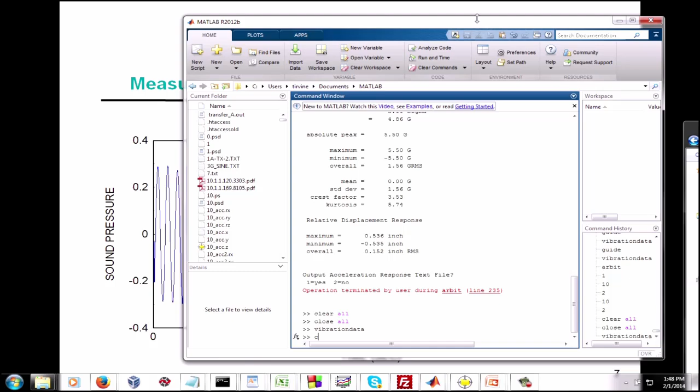So what else can we do with this tuning fork data here? Well, I've got a program I'll show you. It's kind of a fun little program to run. And I'm going to open up my MATLAB here. Now, I've got a program here, and what we're going to do actually is we're going to take a textbook sine function, and we're going to do a numerical curve fit to this data. And the way this will work is the textbook sine function is going to have amplitude, it's going to have phase, and it's going to have frequency.

And we're going to take those three parameters, and we are going to vary those three parameters randomly. And we're going to come up with maybe several thousand trial sine functions, and we're going to compare each trial function to the raw data. And the way we do that is we're going to take the trial function and subtract it from the raw data, and the idea is to minimize the residual error. So we want to come up with the best curve fit through mostly brute force random number generation, but then I also do have some convergence routines built in.

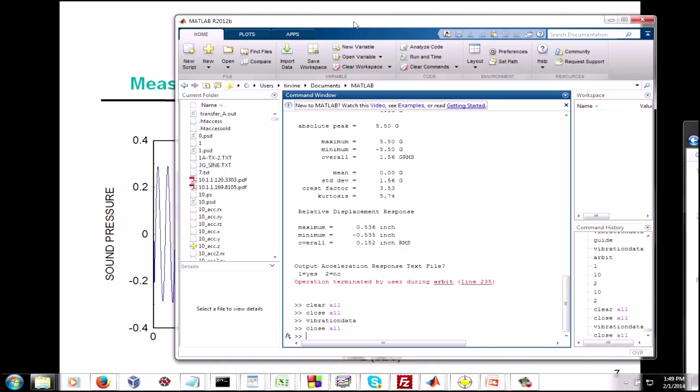So if we go to our MATLAB workspace here, or command window I should say, I have a program, and this is available on my blog, and it is called SineFind. SineFind. It's available on my blog. You can freely download it. So I'm going to say enter, and I'm going to say, well, what does this script do? This program performs a sine curve fit for an input file. The time history must be in a two-column matrix format, time in seconds and amplitude. So I'm going to do choice number 1, which is an external ASCII file.

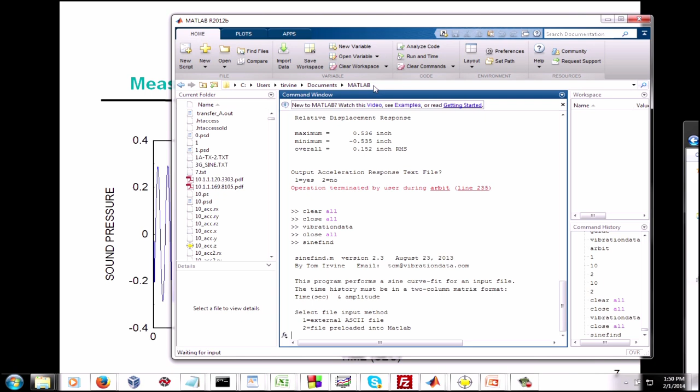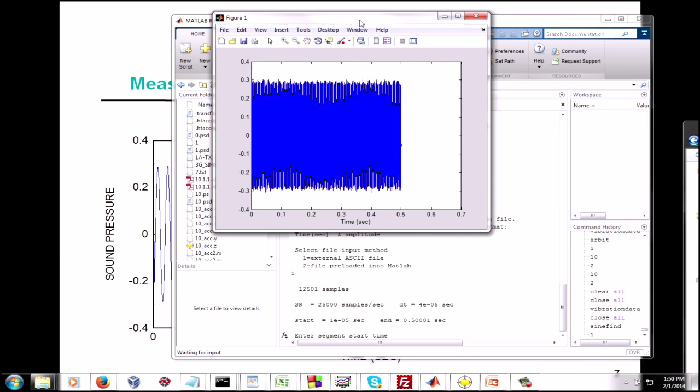So I'm going to call up a file, and it's called tuning_fork.txt. This is some measured acoustic data, sound pressure data. It's uncalibrated, so we don't know how many psi or decibels it is, but that's okay for what we're doing here. And actually, the typical way to excite a tuning fork is to,

well, if you had it in your right hand, you could just rap it against the hard part of your left palm, for example. And that's something that, say, a doctor would do if you were trying to check your hearing or your nerve conduction. Sometimes these tuning forks are also mounted in wooden boxes, and there'll be a little wooden mallet with a rubber tip that you can tap against the sides of the fork.

Some people might think, well, it's a steel tuning fork, why don't you just take it in your hand and strike it against some hard surface? And yes, you can do that, but you might damage or cause some cracks or nicks in your tuning fork, so that's not recommended. But any of those ways that I mentioned will excite the tuning fork into a transient response, and the damping or decay will be very slight, but in this case we're just looking at a half-second worth of time, and there is no decay going on.

Well, the tuning fork still has damping, but I'm actually exciting it into a steady state vibration. And how am I doing that? Well, I'm using a technique called magnetostriction, and we'll talk about magnetostriction in an upcoming unit. But let's go back to our SineFind program, and we're not going to try and curve fit the whole half second. Maybe we'll just take 1/10 of a second or so, or maybe 2/10 of a second.

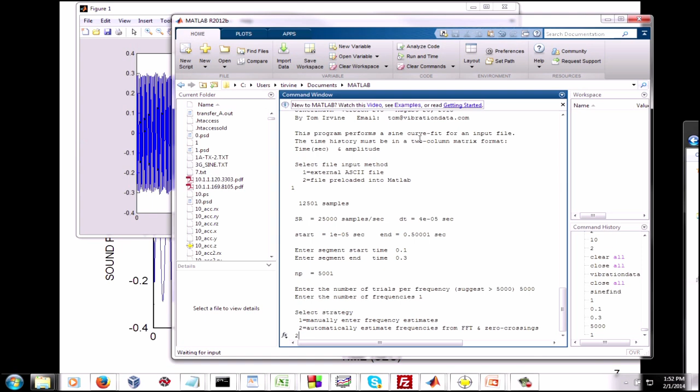There's two strategies we can use. We can manually enter a frequency, which is the estimated frequency, or we can let the program automatically figure out what the frequency should be. So let's do choice number 2. This will be an automatic. Now you can see real time what's going on with the curve fit in our progress, and there's some numbers scrolling by, and this 442.7, that's an estimate of what the natural frequency is.

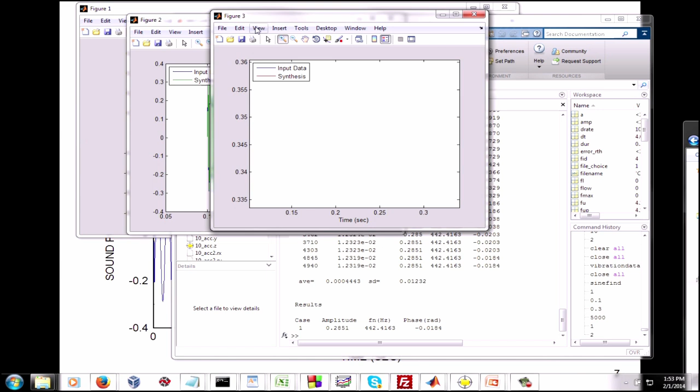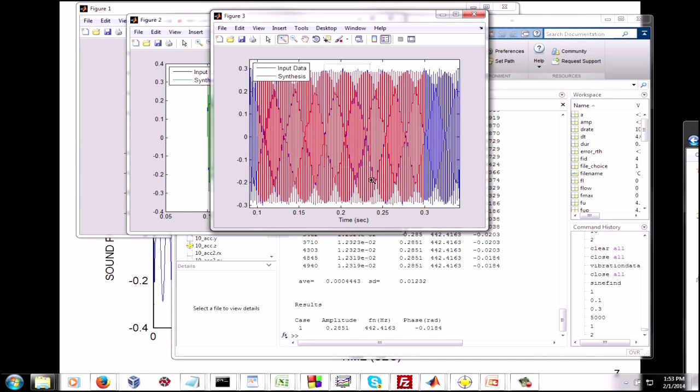Okay, so 442.4 hertz, and phase angle is not important for this case. So it looks like we got a pretty good curve fit here. Let's zoom in a bit, if I can figure out how to work the zoom. Nope. So then what I need to do is go to reset view. Let me try and zoom in again. Well, you get the idea. We did a really good curve fit.

So this gives us confidence that 442.4 hertz is the natural frequency of the tuning fork. And we already did the count the peak method, and we estimated 440 hertz. So this maybe gives us a finer, more precise, or more accurate estimate of what that frequency is. Now I've got 2 or 3 other things I want to show you about this tuning fork.

And one is if we go to Vibrationdata blog, and we type in piano in the search box, we can go to some music acoustics here. So I'm going to click on that, and I've got a diagram here, and this shows the piano keys. And if we download this as a PDF instead of opening it up in the web browser, you'd see this is a little more neat and tidy in terms of the way the keys are presented. In fact, let me just go ahead and do a save link as, and go to that file here, if you'll bear with me.

Oops. Try this one more time. Excuse me, so if we're going to go to C, MATLAB. Okay, that's where I put it. Okay, I've got a few too many directories and things going on my desktop, so you'll just have to be patient with me. Okay, this is a better look of what you'll actually see.

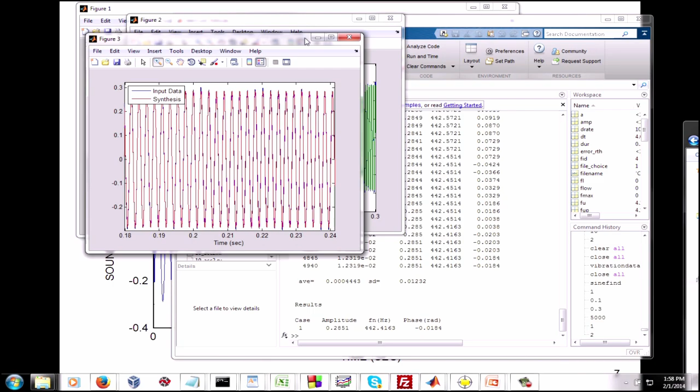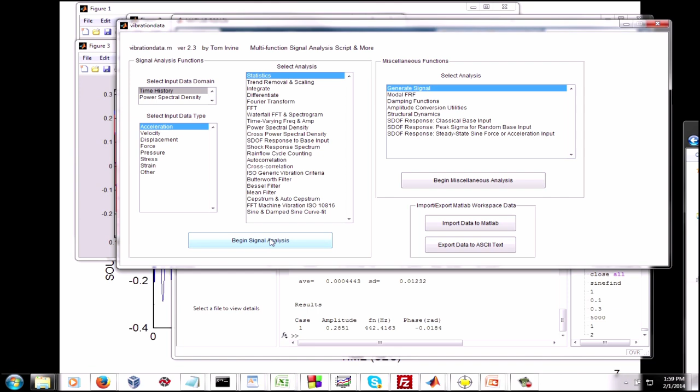So remember I told you about the vibration data script, vibrationdata.m, and you can download this from the blog. So this has all sorts of functions, and throughout the course we'll be going through some of these functions. So the first one I want to take a look at is a time history and its statistics. So I'm going to begin the signal analysis, and this will be an external ASCII text file, and it's tuning_fork.txt. The y-axis, I'm just going to say unscaled sound pressure.

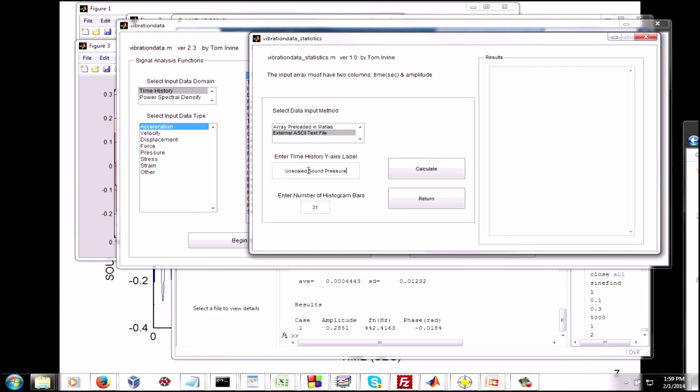We'll also be taking a look at the histogram, more about that later. So then I just enter in the file name. We've already selected the file via the pop-up window, y-axis, click on calculate, and the histograms, we'll cover those in a minute or two. There's our basic time history again. You've seen that before. It's from the tuning fork. But let's go over to this box here. So the result box here has some information.

It has some information on the time step delta t, and sometimes we'll get data that has a variable time step. So this will also show the minimum time step dt min and the maximum time step dt max. We also have the sample rates. The sample rate is the inverse of the time step, and then SR minimum, the minimum sample rate, is the inverse of the maximum delta t, and the maximum sample rate is the inverse of the minimum delta t. So this just gives us an idea of whether or not the delta t time step is constant.

We have some statistics here. We have the mean value. For our purposes, the mean value is essentially 0. Then we have our standard deviation, our RMS. Well, what's the difference between a standard deviation and an RMS? Well, we tend to use those terms kind of interchangeably in vibration analysis. But I want to show you an important formula here. So if we have a signal, maybe I'll put this at a bolder font or larger font.

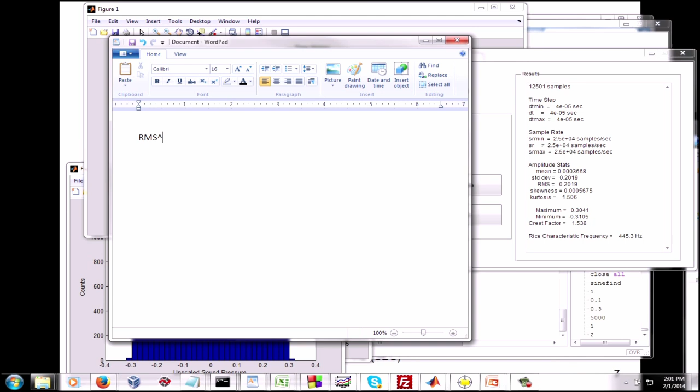RMS squared equals the standard deviation squared plus the mean squared. So the RMS value is always greater than or equal to the standard deviation. And RMS, as most of you would know, is root mean squared. So it's always greater than or equal to the standard deviation. And sometimes we'll represent a standard deviation by the Greek letter sigma, or we might say 1 sigma for one standard deviation. And then we have the mean.

Well, in many cases, not all, but in many cases with measured dynamic data, either through AC coupling or high-pass filtering or just the nature of what we're measuring itself, mean will be 0. Not always, but in most cases probably mean will be 0. Well, if mean is 0, RMS and standard deviation are the same numerical value. That's pretty much what happens here to 4 decimal places for our tuning fork data.

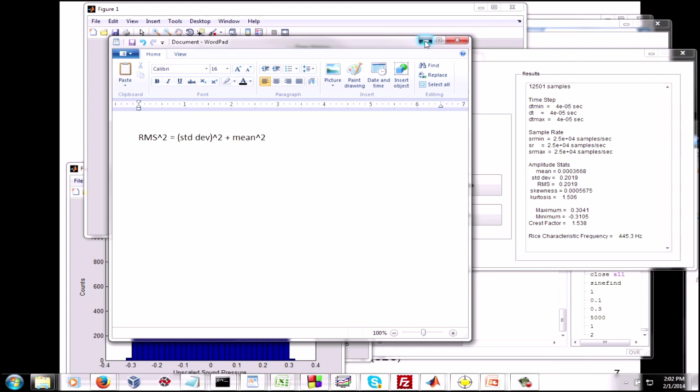So we get a little lazy, a little sloppy, I guess, and we kind of use standard deviation and RMS interchangeably. But please know that they are actually different quantities. Okay, enough about that. Kurtosis, we'll be covering that later on, but for a pure sine function, kurtosis is 1.5. When we get to broadband random vibration, then we're going to find that if that vibration has a normal distribution, then the kurtosis will be 3.0.

Then we see the maximum and minimum. Now crest factor, that's sometimes an important parameter. That is going to be a ratio of the peak absolute value divided by the standard deviation. So this just gives us an idea of what is the scale factor to go from the standard deviation to the highest absolute peak.

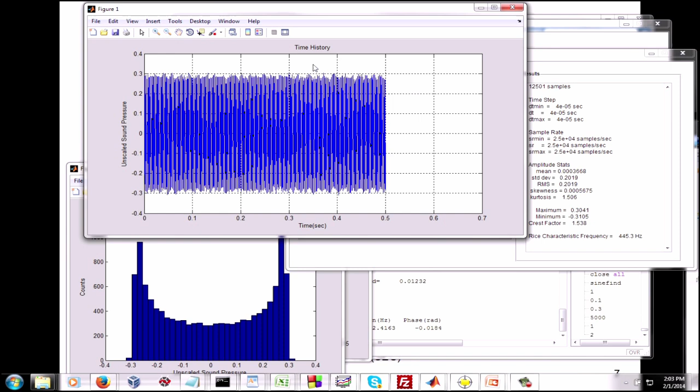And then I was talking a few minutes ago about the Rice characteristic frequency. In this case it is 445.3 hertz. So that's just another way of estimating the natural frequency. But of the three methods we've looked at so far, the most accurate in this case in terms of getting fine accuracy, I would say was the sine curve fit. Okay, so that's pretty, oh, one other thing too.

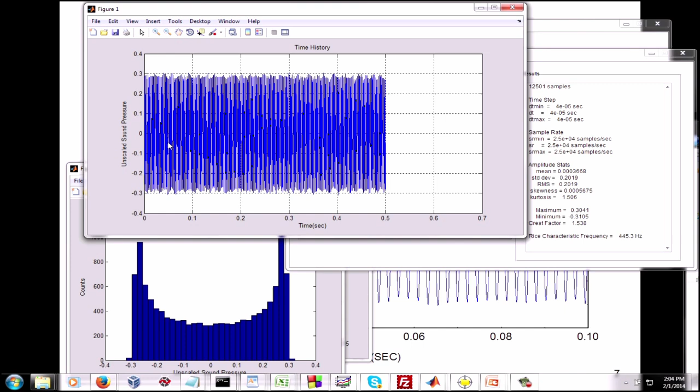A lot of times when we have signals, we like to take a look at the histogram. Well, how do you calculate a histogram? Well, we're going to take the amplitudes and divide them into bins. Typically these would be evenly spaced bins. Now this is digital data, so what are we going to do? We're going to count the points of the instantaneous values that fall within each amplitude bin. And we're going to plot that up, and it's going to be a histogram.

So here's the histogram of the tuning fork data. The y-axis is counts, that's the number of instantaneous data points within each bin. Then the x-axis here is unscaled sound pressure. Now our tuning fork isn't quite a pure sine function, although it's somewhat close. A pure sine function has a histogram that's called by the nickname bathtub curve.

And the explanation for this bathtub curve is that the sine function likes to dwell at its peak negative level or its peak positive level, with a somewhat rapid transition in between. So that's the nature of a pure sine vibration.

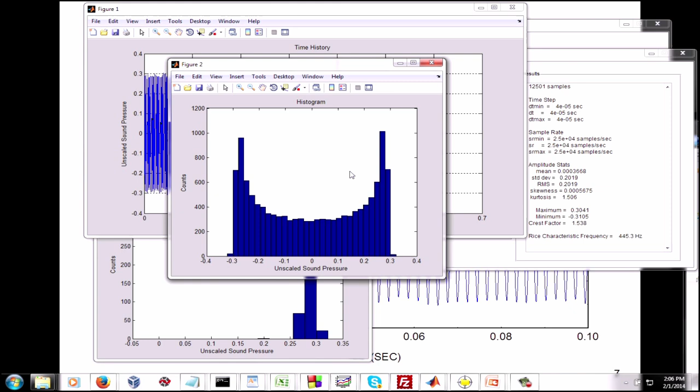Now, later on we're going to be talking about white noise and broadband random vibration. A random vibration would typically have a bell curve histogram, or you might say a normal distribution, or a Gaussian distribution. So Gaussian distribution, normal distribution, bell curve distribution, we kind of use those terms to describe the same thing. And we'll be talking more about random vibration in an upcoming unit. There's also one called the absolute peak value distribution, and we'll be talking about that later, so I'm not going to cover that now.

So anyways, it's very typical when we get vibration data that we have a task of trying to figure out what the parameters are, do some signal identification. If we have a sine function that's present in our data, we have to think, is that an excitation function? Is it a natural frequency? Is it a natural frequency being excited into resonance, or what is it?

What's going on? So part of what we need to do is to develop some critical thinking skills. That's one of the themes in this course. I want the students to be able to develop some critical thinking skills. Well, let's move on to some other slides here.

So we're talking about natural frequencies, and there's different ways to demonstrate this, and we'll show one in a minute. But a natural frequency is the frequency at which a mass will vibrate if it is given an initial displacement and then released so that it may vibrate freely. And free vibration is also called simple harmonic motion.

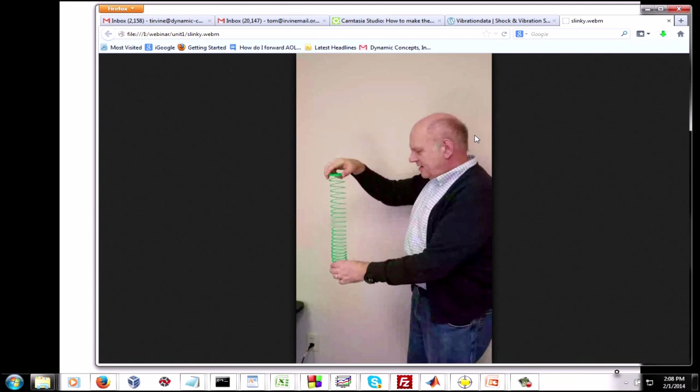And this is a slinky, and I'm holding it upside down. And I'm going to give the slinky an initial displacement. Now, after I release it, the stiffness property from Hooke's law will try and pull the slinky back to its equilibrium or rest position. But the slinky is going to overshoot the rest position mark due to its mass or inertia. So what I'm explaining in this video is that we're going to give the slinky an initial displacement there, and then we're going to watch it in its free vibration. And that's going to occur at the natural frequency of the slinky.

So here I am, I'm releasing the slinky, and it's going through a couple of cycles of oscillation, each time overshooting the rest position. Now eventually it does return to the rest position after a number of cycles oscillating at its natural frequency. There is a property called damping going on, and damping is an energy dissipation mechanism, and that occurs because there's frictional effects in the coil. There may be some air resistance, for example, and some boundary damping. But anyways, what I've done there is to sort of demonstrate natural frequency with the slinky.

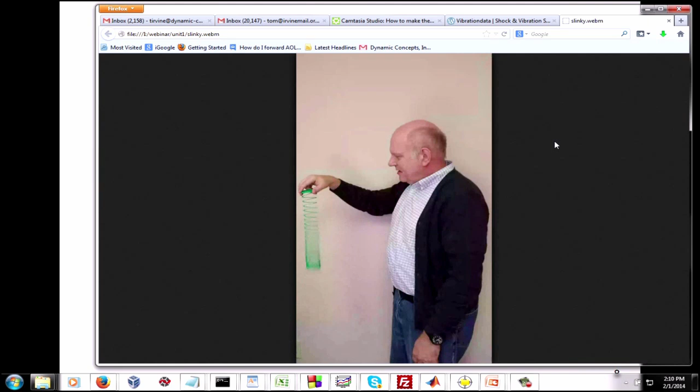So let's see what we can do with the slinky. Let me give it an initial displacement again. So now I'm giving it an initial displacement, and I'm going to do a little trick here. And if you watch the top of my hand, the top of my hand is actually vibrating at the natural frequency of the slinky. I'm exciting this to its natural frequency, which is called resonance. So this is a resonant effect. Motion going on with my hand, and there's dynamic amplification effect. Just barely see. And I would call this a base excitation effect, even though my hand's at the top of the slinky. Or you might call it a seismic excitation or support motion.

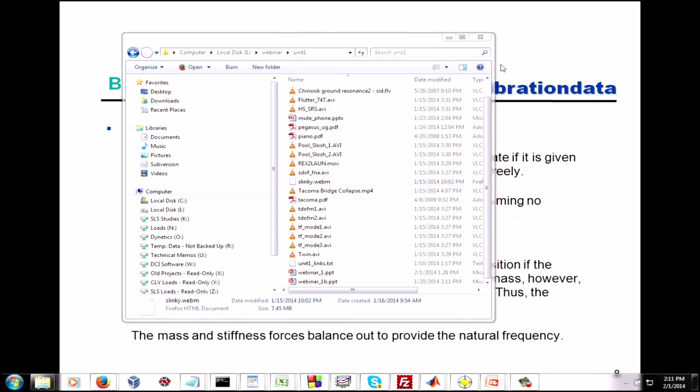Amplification factor occurring. So you might want to just get a slinky of your own, buy it at a toy store or something, and play around. It's a good way to demonstrate natural frequencies. Okay, enough about that. Let's go back to the slides here, and I'll show you some fun things. So we've talked about natural frequencies just a little bit.

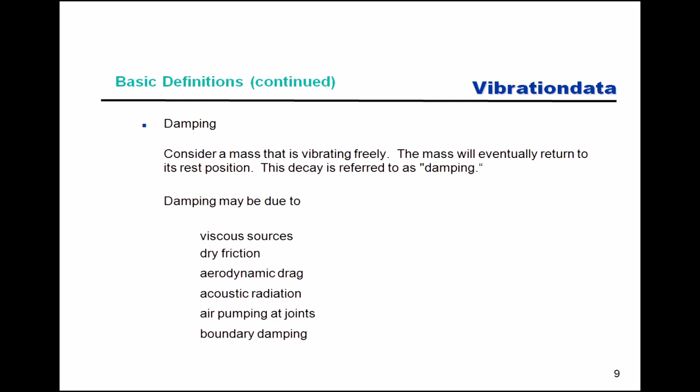Damping. There's all manners of different damping. This is an energy dissipation that occurs, and if we give our object an initial displacement or initial velocity, the vibrations will eventually decay due to the damping property. These could be due to viscous sources, dry friction, aerodynamic drag, acoustic radiation, air pumping or sliding in joints, boundary damping, and many other ways as well. And damping is very important. We'll be talking about it throughout this series of webinar units.

So when we're dealing with systems, we like to idealize them as single degree of freedom systems. And this is a system that has only one natural frequency. And even if we have a real complex structure, just to get an initial estimate of its response or to initially characterize it, we try and simplify it to be a spring mass system.

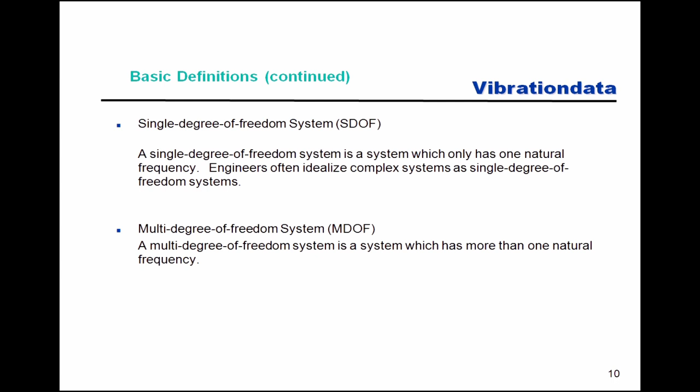But in reality, all systems are multi-degree of freedom systems. They have multiple natural frequencies. And if we want to be even more rigorous in our terminology and definitions, we might say, well, in reality, every system is a continuous system, and it has many natural frequencies.

And I wish I had a plot of the mode shape, so someday I'll need to figure out how to get one of those. But this information comes from an authoritative seismology textbook. So that is a very, very low natural frequency.

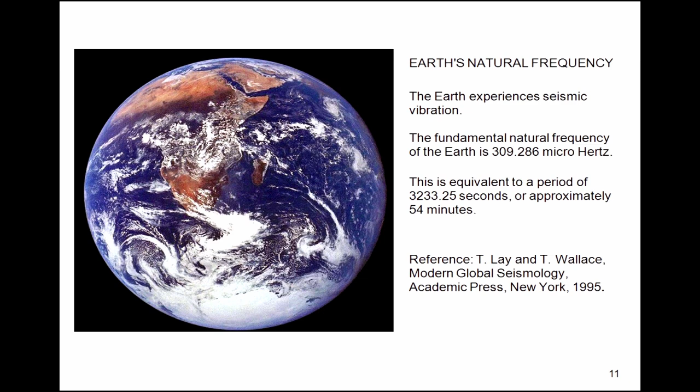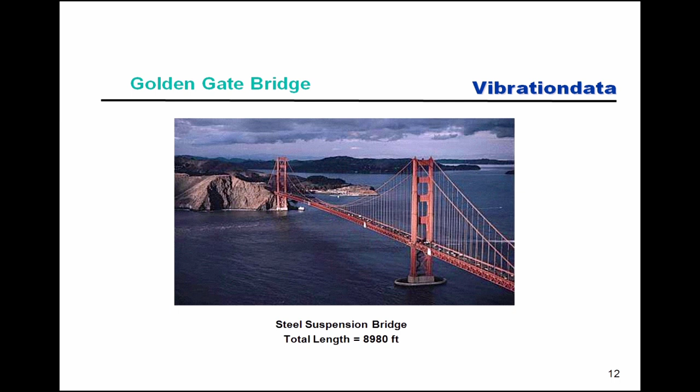That's quite obvious. But then it also has to withstand potential earthquakes, because in San Francisco there's the San Andreas Fault, and there's the Hayward Fault, and many other smaller faults that sort of crisscross the coastal areas of California. And also there's the possibility of winds, and then the incoming and outgoing ocean currents as well. So let's see, talked about those already.

The Golden Gate Bridge has performed well in all earthquakes to date, including the 1989 Loma Prieta earthquake. Several phases of seismic retrofitting have been performed since the initial construction. Now here's something interesting. The current Caltrans, that's the California Department of Transportation, the current Caltrans standards require bridges to withstand an equivalent static earthquake force of 2 Gs.

And later on, in a series of webinars, when we get to our shock unit, we'll be talking about earthquakes and seismic forces. And we're going to actually come up with a plausible story as to how that 2G limit was derived. Now, some of you may come from the aerospace industry where you work on launch vehicles, and some of you might have to design and test avionics boxes to withstand shock events from pyrotechnic stage separation events, for example. So in some cases, those avionics have to withstand 10,000 Gs acceleration.

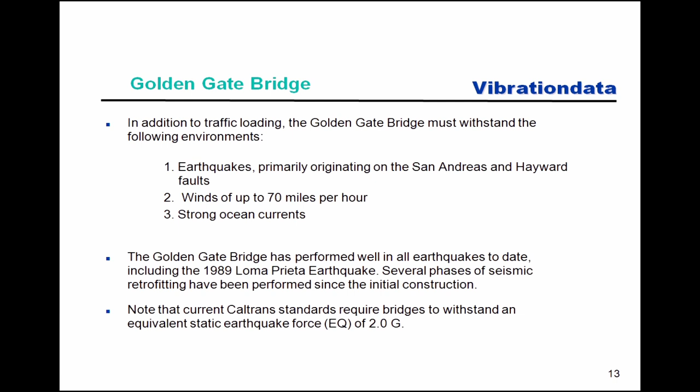So you might ask, well, an avionics box has to withstand 10,000 Gs, but this bridge upon which human lives depend only has to withstand 2 Gs. And well, there are some differences there. The pyrotechnic shock event happens in a matter of milliseconds, and it's dominated by high frequency energy above 1,000 hertz. But with earthquake events, most of the energy is below, I'll say below 10 hertz, and the durations are a lot longer. So there's sort of an interesting trade-off when we think about amplitudes and frequency content and durations, and as we go along into future units, we'll be actually analyzing some earthquake data as well as some pyrotechnic shock data.

Now as we do this calculation, we get radians per time as our unit, and typically it would be radians per second. And if we want to get frequency in hertz, then we would take that omega sub n and divide by 2 pi.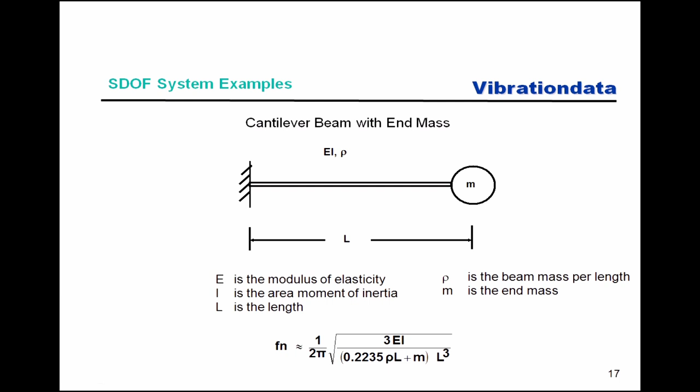It's just some things you might have come across. Here's a formula for the cantilever beam with an end mass, and later on I'm going to be showing you a paper that derives formulas for different beam configurations. But some of you may have seen formulas like this before, maybe in a handbook or something. More about beams later on.

Circuit boards. I've dealt a lot with avionics boxes in my previous career. So I just took a sample of avionics boxes where I had the opportunity to measure the fundamental frequency. And the acronyms aren't important, but just for this sample of 6 boxes, the lowest natural frequency or fundamental frequency was 65 hertz. Then the highest was up at 580 hertz. So the average was 328 hertz with a rather high standard deviation of 203 hertz.

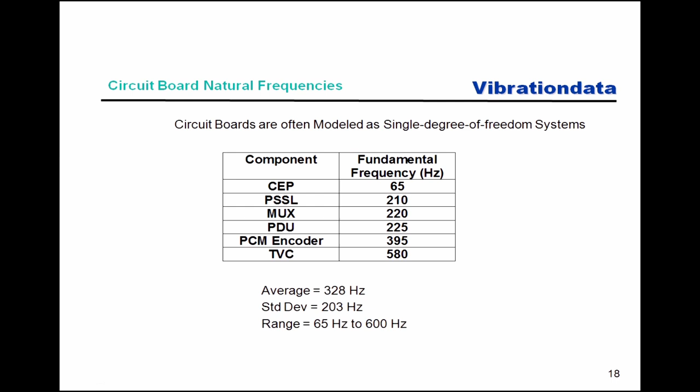And the CEP was actually an older avionics box, probably from the 1970s era maybe, and it had some very thick circuit boards with very large dimensions and had the lowest fundamental frequency. But nowadays, with increased miniaturization and surface-mounted parts being used, circuit boards get smaller and smaller, so the fundamental frequencies tend to get larger, at least for the avionics flown on launch vehicles.

I think we talked about these formulas already. So if we have a frequency in hertz, Fn, we can multiply by 2 pi to get the radians per second, and so on. And the period of oscillation is 1 over the natural frequency in hertz. We've talked about that already.

A textbook I'd highly recommend that you get if you don't have it already. It's called Dave S. Steinberg, Vibration Analysis for Electronic Equipment. And this is a good book. It has a lot of real practical formulas in it. And even if the only thing you ever do is analyze plates and beams and mechanical structures, this is a good book to have. He covers random vibration, shock, fatigue, stress, dynamic stress, and I highly recommend that you get this textbook. Some of the materials that we're going to be covering in these webinars overlap what's in this textbook or are kind of based on what Steinberg has done, more or less.

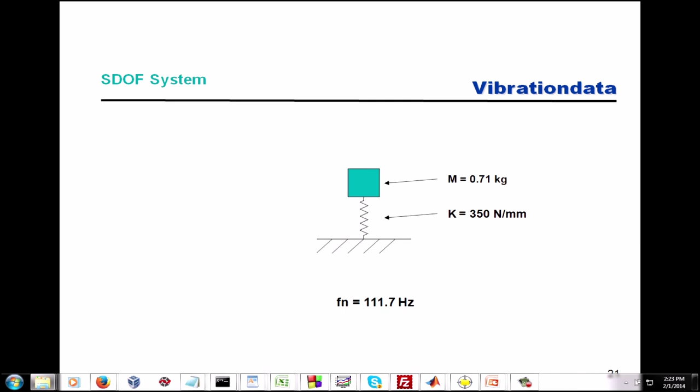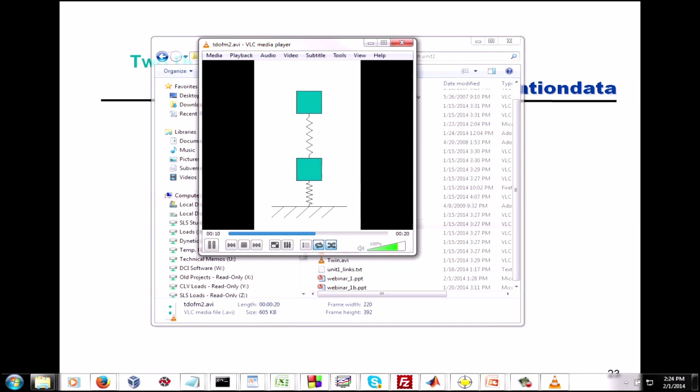So you could think of this, for example, as an avionics box where the top mass was the circuit board and the bottom mass was the box chassis. So that's the fundamental mode. Let's take a look at what the second mode is. And here we have the two masses. They're vibrating 180 degrees out of phase with one another. So we have out of phase vibration there. So those are the two modes of the 2 degree of freedom system.

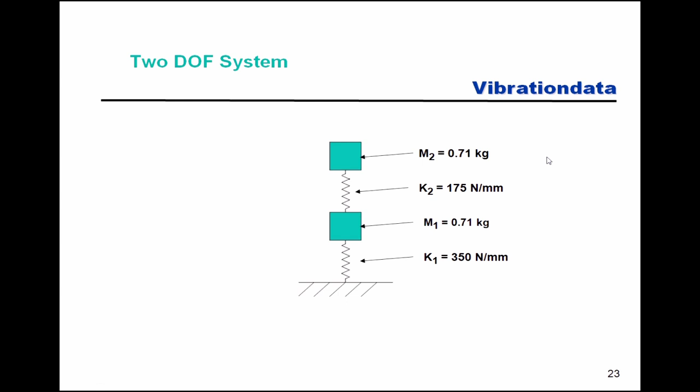And later on we're going to be covering mode shapes of beams and plates and other types of structures. So we already took a look at the animation.

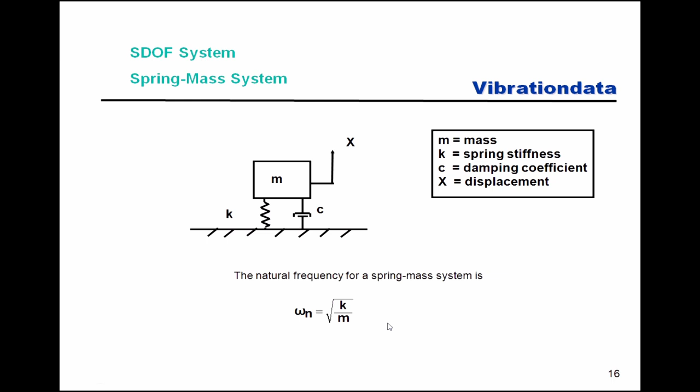So the astronaut would rock back and forth, get himself into a resonant vibration, and then the natural frequency in hertz could be measured from his rocking. And from there he could use that previous formula to back out what his mass was. So this is the formula that the astronaut could use to indirectly calculate his mass. So that's one of the somewhat rare examples where vibration in aerospace is actually put to a useful purpose. There's others as well you could probably think of. But mostly resonant excitation is to be avoided.

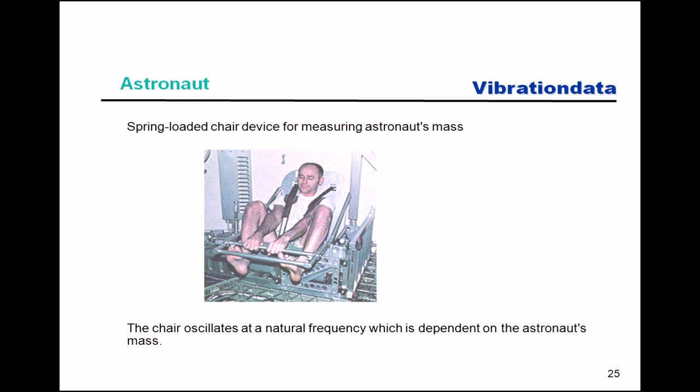So we talked about resonance. There's different ways that resonance can occur. It can occur when we apply a force or a base excitation of some sort that coincides with the system's natural frequency. For example, we may have a bulkhead on a rocket vehicle where the avionics are mounted, and the bulkhead's natural frequency might be excited by a motor pressure oscillation, for example.

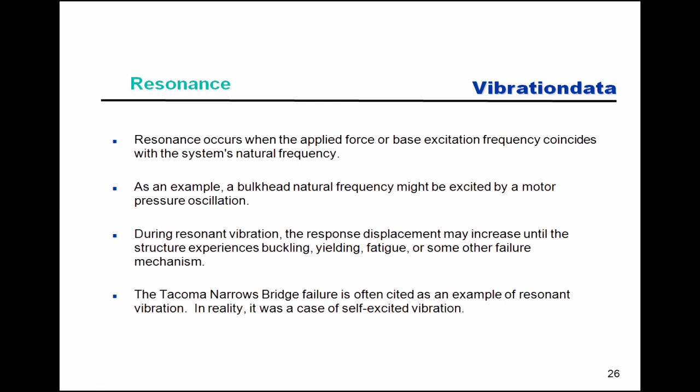And again, as I mentioned, during resonant vibration, the response may increase until a structure experiences buckling, yielding, fatigue, or some other failure mode. And the Tacoma Narrows Bridge failure is often cited as the all-time greatest classic example of resonant vibration. But strictly speaking, no, it wasn't resonant vibration. It was a case of self-excited vibration. And we'll talk more about that in an upcoming slide.

So what I want to talk about now are the 4 methods by which a structure's natural frequency may be excited. Now, for the purpose of this class, there's actually more than 4, but there's 4 main ones. So some of you have done modal testing before. That's M-O-D-A-L, modal testing. And you've taken an impulse hammer and you've excited a structure in order to measure the natural frequency, and the damping, and maybe even to characterize the mode shape or some other parameters. So if we strike something with a hammer, that's an applied force.

Some of you may play baseball or softball. When the ball hits the baseball bat, that can excite the bat's natural frequencies as an applied force. We could have airflow or wind exciting a structure. That could be a tall building. It could be an aircraft wing. It could be a flagpole. Ocean waves excite offshore structures. That's an applied pressure.

Rotating mass imbalance in a motor. So we get into machinery dynamics, and that rotating mass imbalance would be an applied force. Pressure oscillations in a rocket motor, that would be an applied force. Also acoustic excitation is an applied pressure. So anytime we have a structure, we have to think, how could it be excited? And it may be excited by an applied pressure or force.

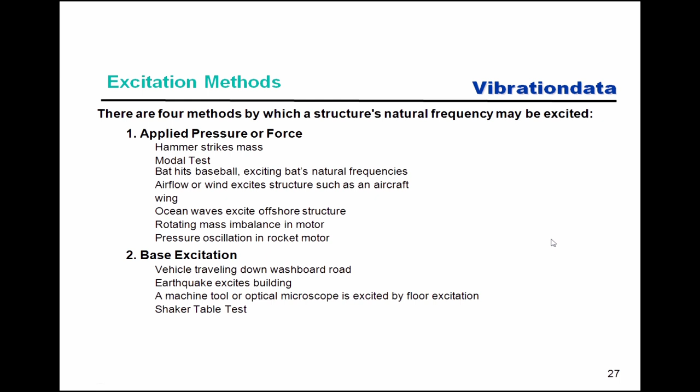Now the third one is self-excited instability. This is the most exotic of the 4. And an example of this would be airfoil or bridge flutter. And this self-excited instability, sometimes it's also called negative damping as well. Then there's initial displacement or velocity, and I already demonstrated this via the slinky. Another example is plucking a guitar string. Pegasus drop transient, we'll talk about that maybe in the next unit.

Or when we accidentally drop something on the floor, well, that's actually a very complex dynamic problem, but we would say that as the object is striking the floor, it experiences an initial velocity as it impacts the floor, and we would model the system accordingly. Well, in reality, when you drop something on the floor, it's probably going to experience some plastic deformation, which is beyond the scope of our simple linear single degree of freedom models. But nonetheless, just as a first cut, we model the accidental drop as an initial velocity of a single degree of freedom system.

Obviously, the other excitation methods, we'll talk about magnetostriction coming up in a future unit, and you can probably think of a few others as well. But these four here will probably cover 99% of what we actually encounter in our engineering tasks that we have to perform. And we're partway through the first unit now. I'm going to go ahead and end this presentation because I like to keep these just below an hour. And when we come back in our next unit, we're going to continue natural frequency analysis and talk about different systems.